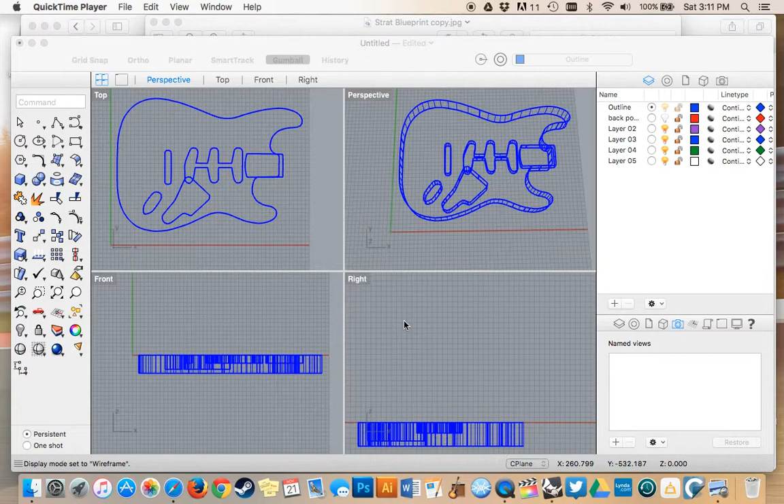Welcome to part 6 of our Stratocaster build. So right now we're going to go over how we're going to Boolean split all of our pockets that we've created. And then we're going to go over how to move our back pocket down and Boolean split it up.

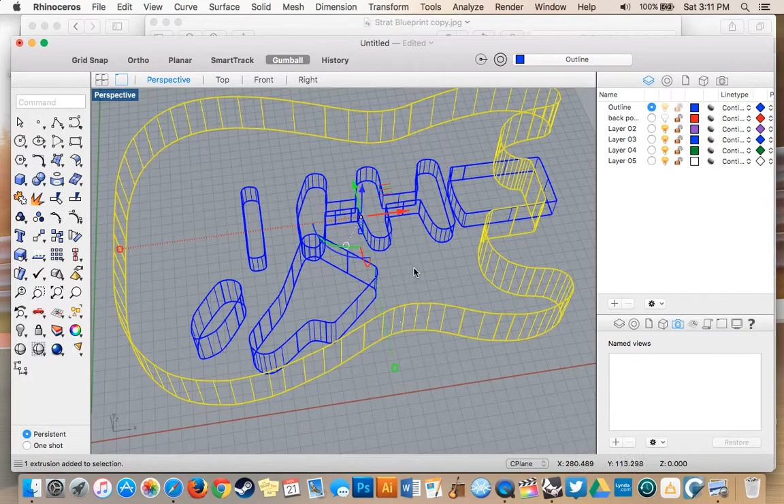So I'm just going to go ahead and work in our first layer. Actually, before I do that, I'm going to go around because as you can see here, this layer is called outline, and we extruded all of our curves in the outline layer. So if you select the top there, you see you can select the curve or the extrusion. So I'm going to go around and I select the curve of every extrusion that we've done.

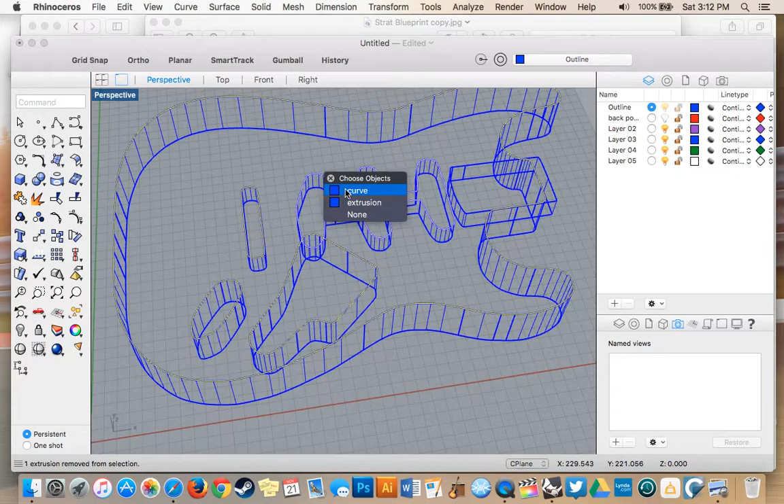I'm going to go ahead and move those to another layer. I'm going to name this outline. I'm going to rename this body. So now if I select off that, I'll change the color so it's more visible. So as you can see here, our outline is this nice green color, and our body is now blue. So I'm just going to keep our outline turned off.

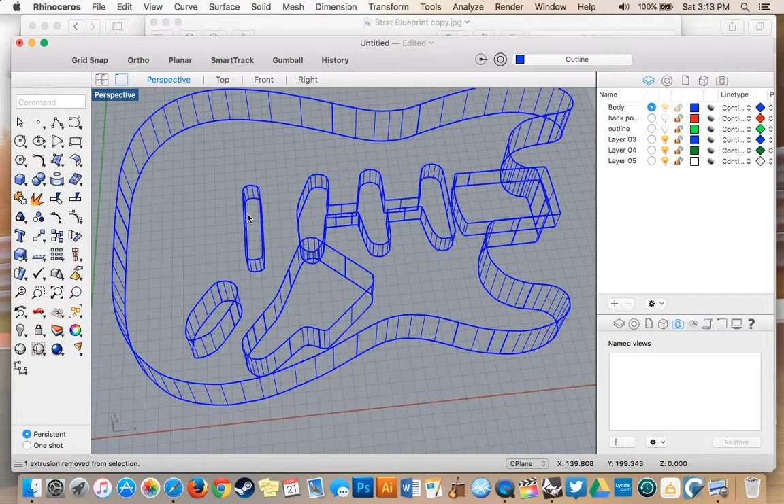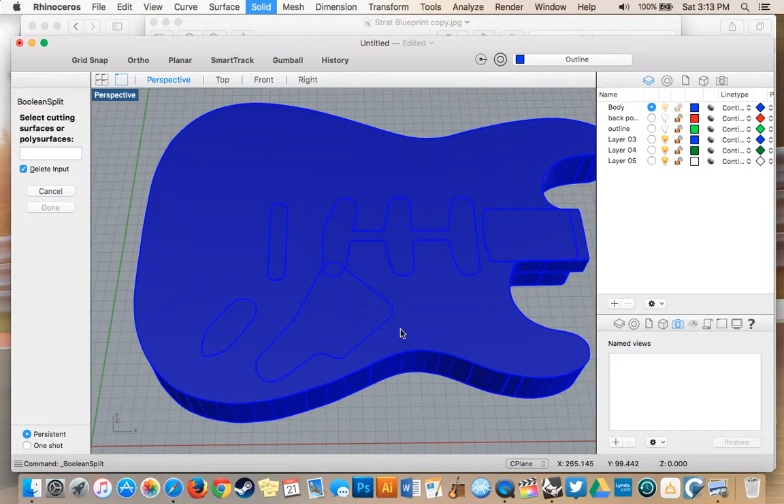So now we're going to Boolean split all of our pockets. I'm going to turn on our shaded view just so it's easier to see what's happening. So Boolean split is something you do to a solid object. So I'm going to go under solid, go down to Boolean split, select the poly surface that we want to split from. So that's going to be our guitar body. So I'll select that, press enter, and now I'm going to go around and I'm going to select all of these extrusions. Go ahead and press done. So now it's split them.

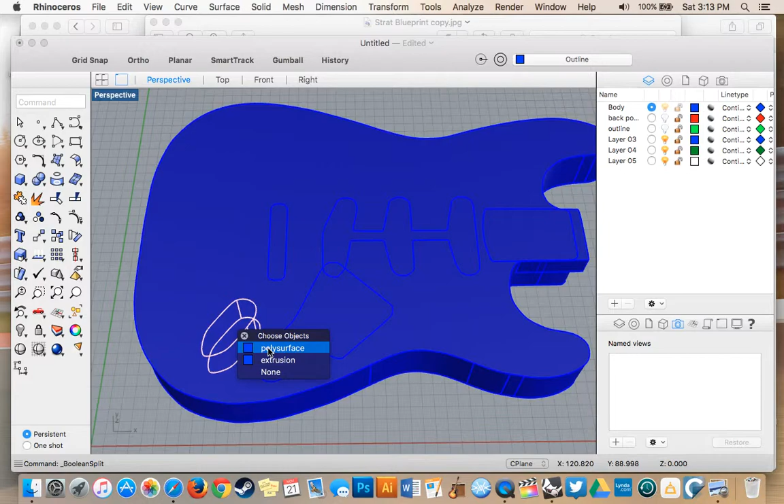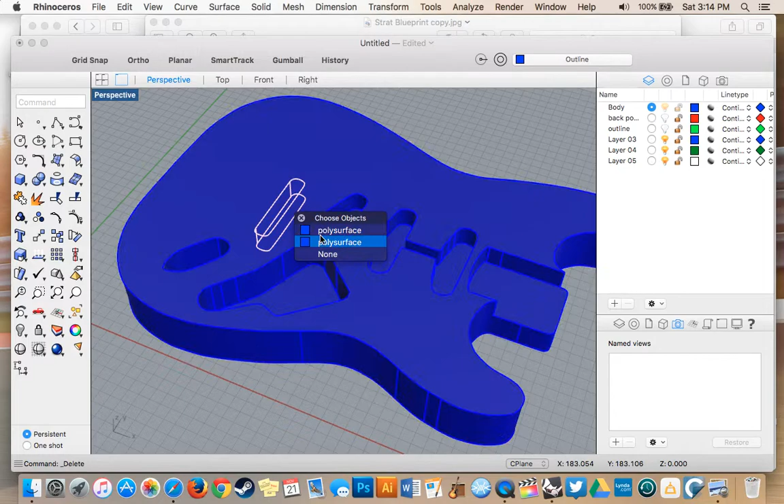So now I'm going to go around and I'm going to delete everything that's left of these extrusions and poly surfaces. So there you have it. There's the top. Oh, missed one there. There you go. So there's the top of our Stratocaster.

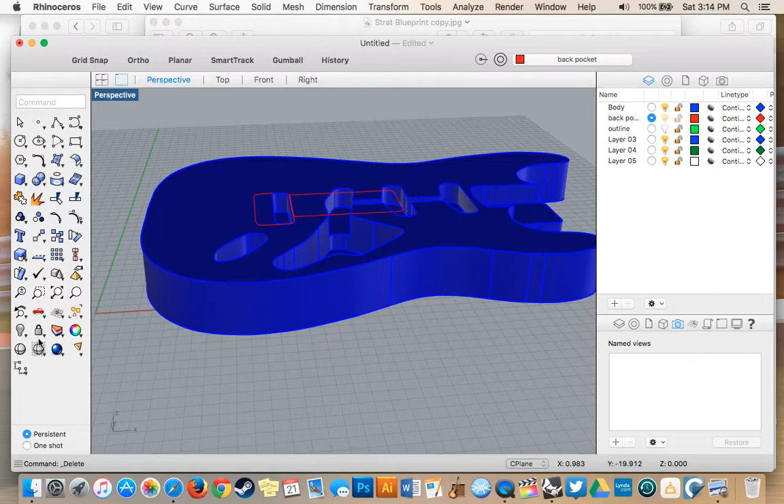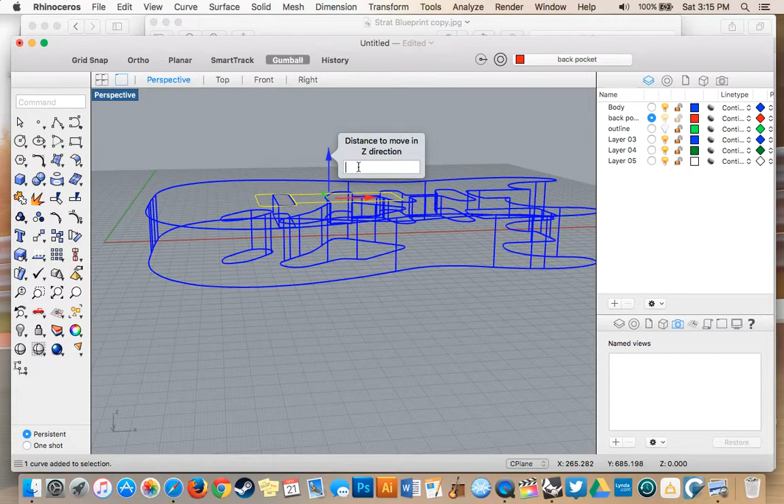So now we're going to go into our back pocket. So I have this outline that we did earlier, and what we need to do is we need to move it down to the bottom of the guitar, and we need to extrude upwards into the guitar. So I'm going to go ahead and change our view back to wireframe so it's easier to see what we're doing. I'm going to select both of our objects there by holding shift down and selecting them both. Turn the gumball tool on so we can easily move objects, and I'm going to move them in the Z direction, -45 millimeters down, which is the exact same dimension as our guitar, 45 millimeters, so it should be right on the same axis line as our guitar.

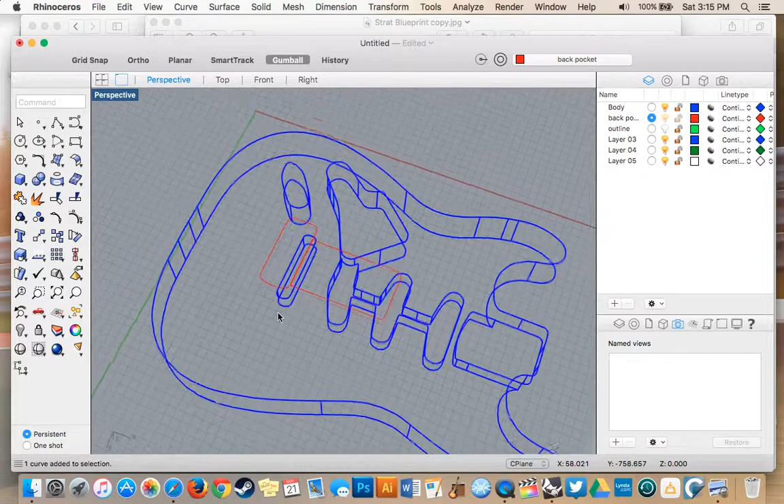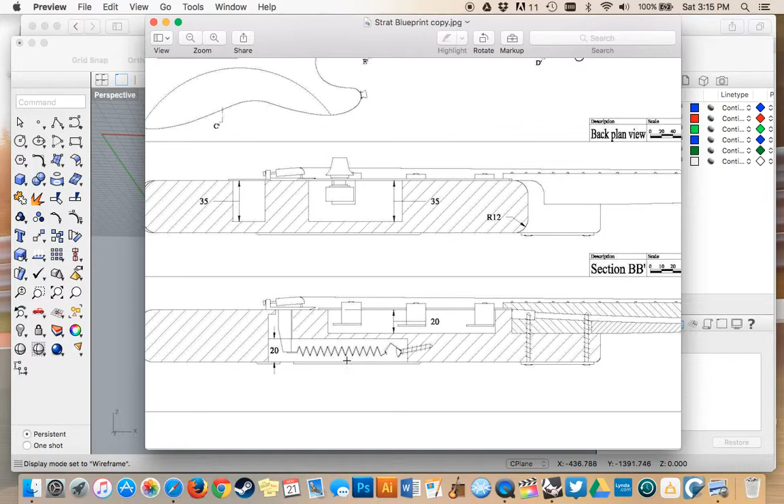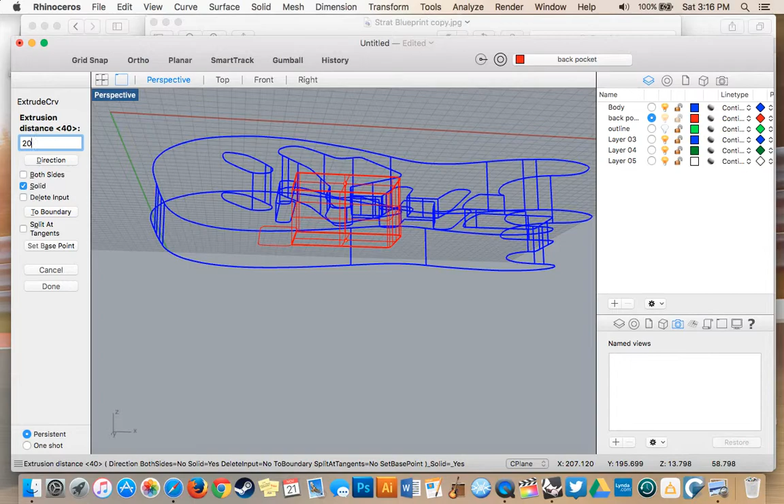Go ahead and turn our shaded viewport back on now, and I'm going to Boolean split. Oh, sorry, I have to extrude these objects first. Sorry about that. Go back to wireframe. So in our blueprint, this pocket here, right here is 20 millimeters, and the pocket above it is 20 millimeters as well. So I'm going to extrude this one 20 in the positive direction. So all of our other ones, we're extruding them down. This one we're going to extrude up.

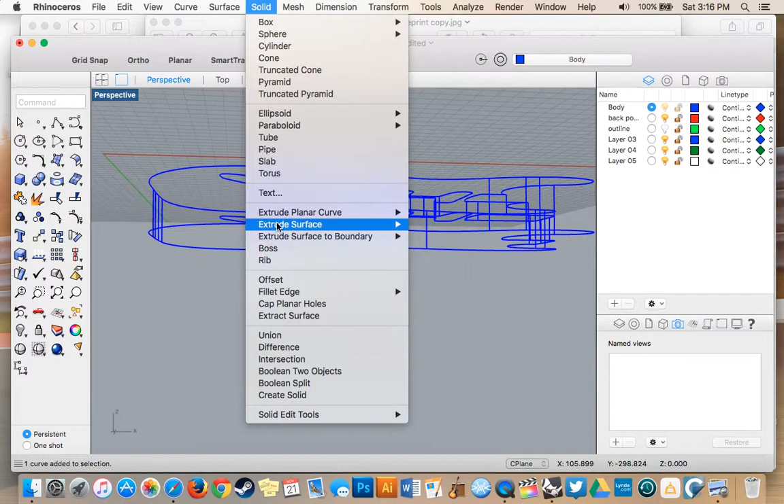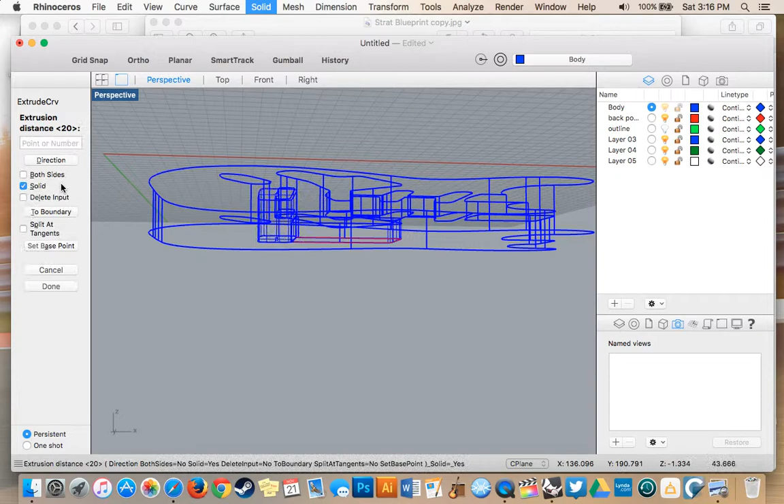I'm going to go ahead... I'm going to redo that, make sure that we're in the body layer. So I undid that, I went to the body layer, so now I'll be extruding up into the guitar. Go ahead and redo that. And I'll extrude this one 20 millimeters up. Now I can turn off that outline. Now I can turn on our shaded viewport.

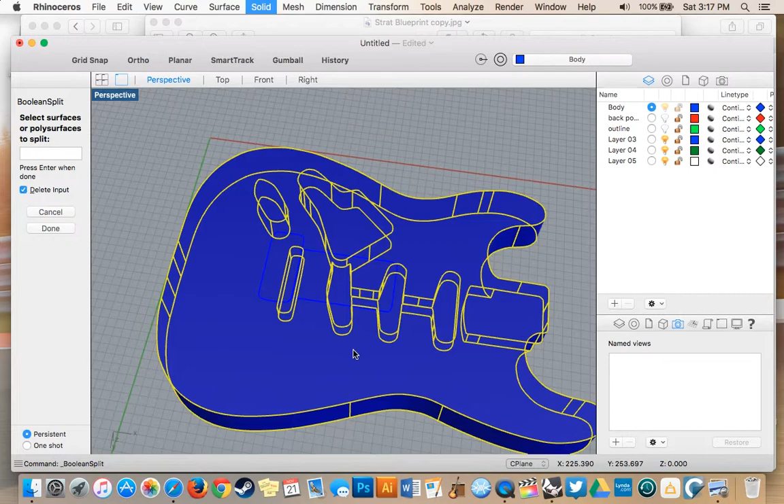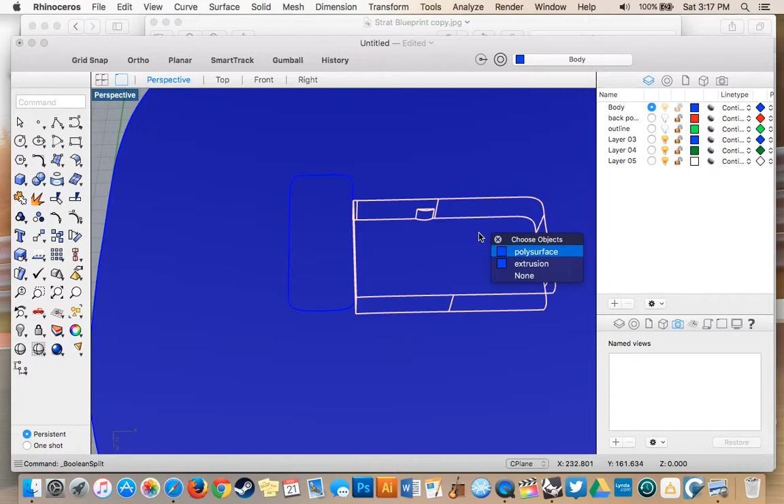I'm going to go ahead and Boolean split these objects out. So I'm going to split it from our guitar. And I want to split out our extrusions, if I can select it here. There we go. Done. So now I'm going to go ahead and select all these surfaces and delete them out. So there you have it.

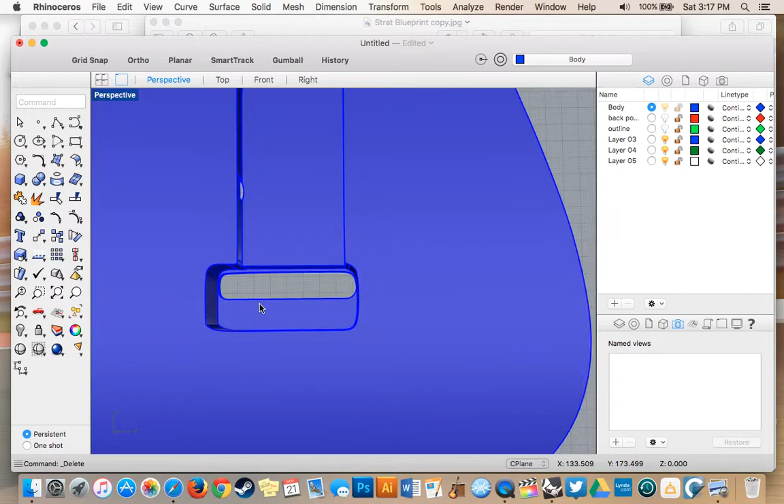There's our back pocket. So it should be a little offset here so that our bridge will fit in there nicely. As you can see here, we have a little hole from our volume control pocket. It's not a problem. Shouldn't affect our final product there at all. So in our next video, we're going to be going over filleting the edges, and then after that, we will put in our belly cut and our arm cut.